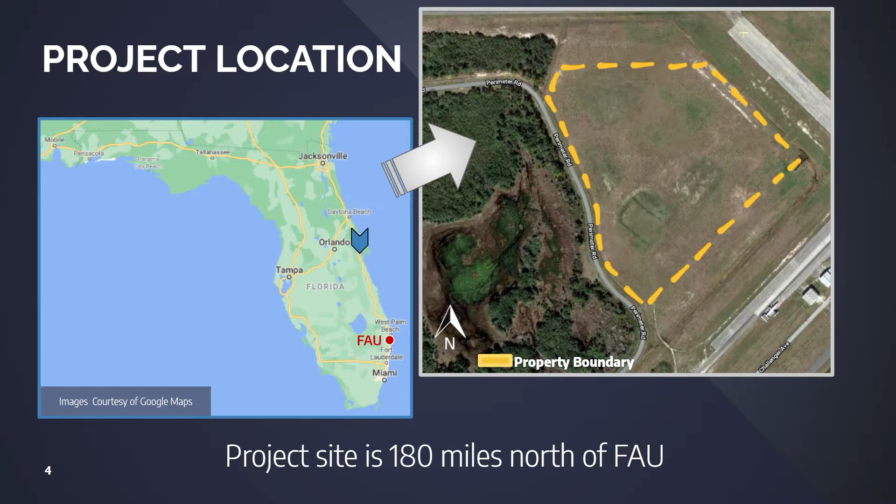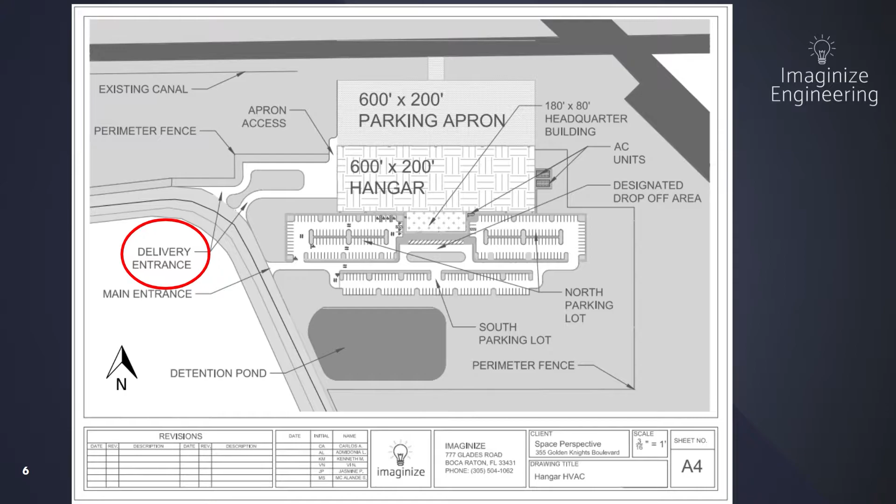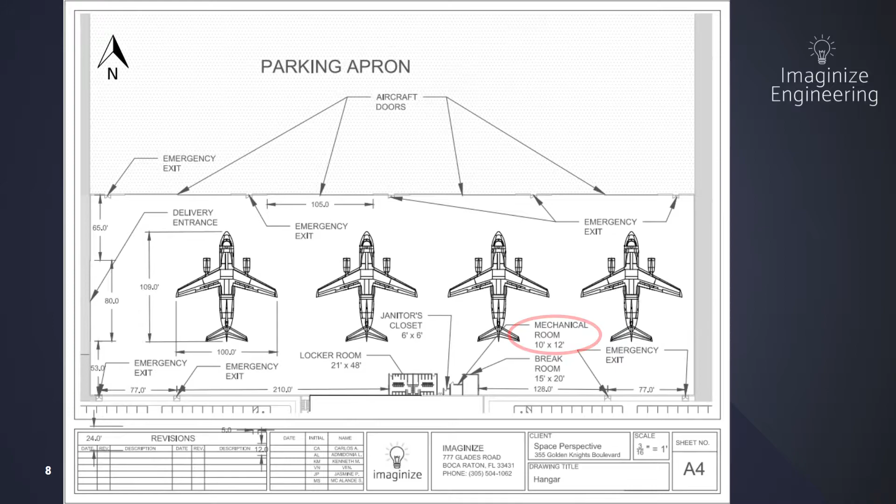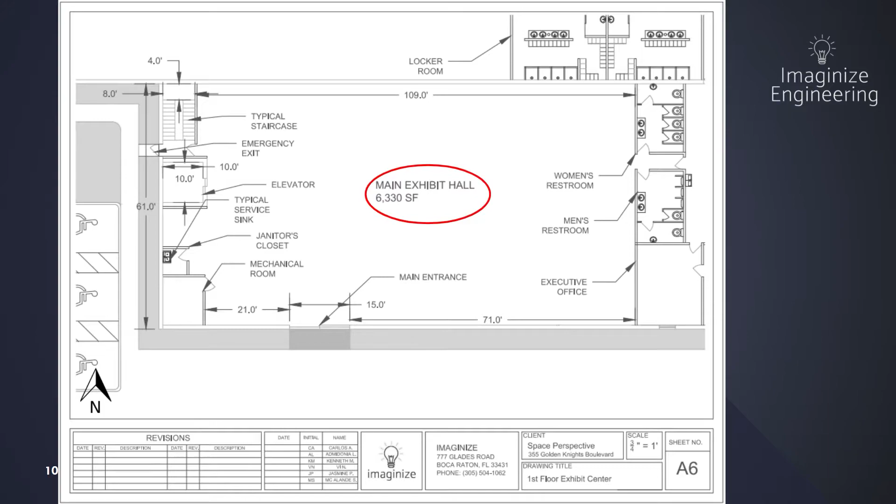The west side of the headquarters building will be used to house the visitor center. The main guest entrance will lead to an open 6,330 square foot space, which serves as the main exhibit hall. Guest restrooms can be found adjacent to the exhibit hall, and access to the second floor can be reached using the elevator or the staircase on the west wall of the building.

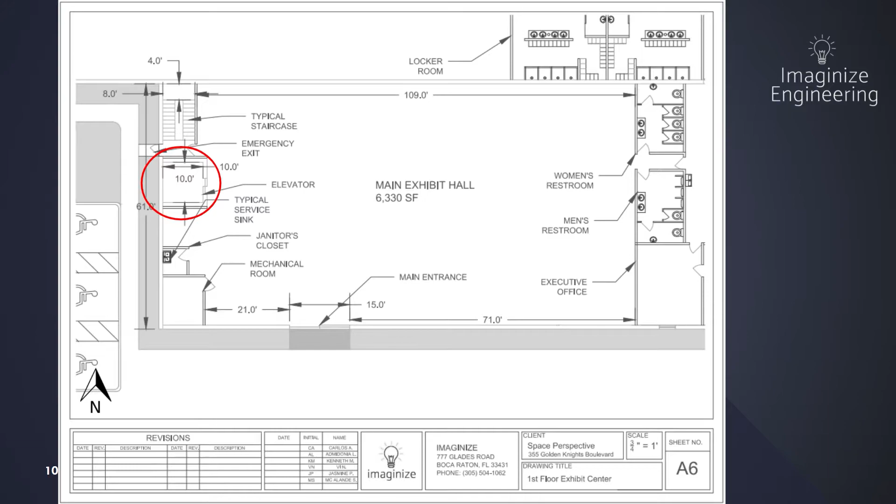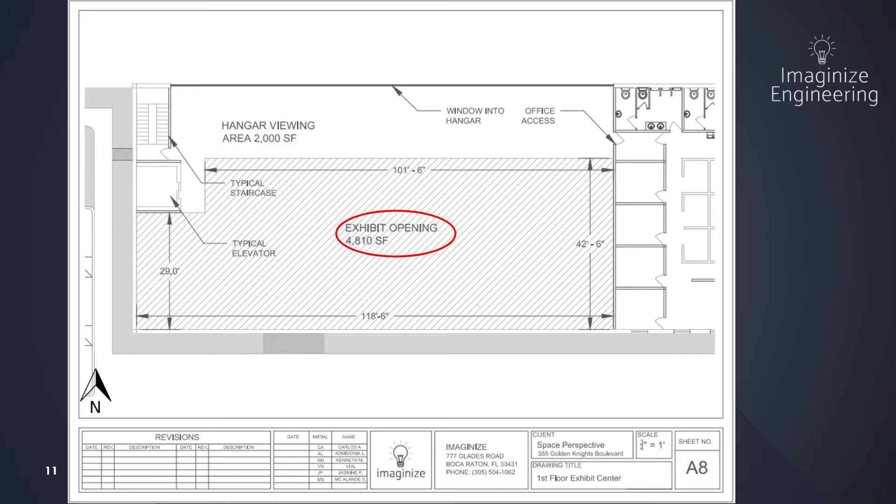The second story of the west side will incorporate a 2,000 square foot viewing deck, which will allow guests to view the manufacturing process within the hangar through a 110-foot long window. Additionally, there will be a large 4,810 square foot opening to allow large exhibits on the first floor to extend past the ceiling while also providing a bird's eye view of the exhibits below.

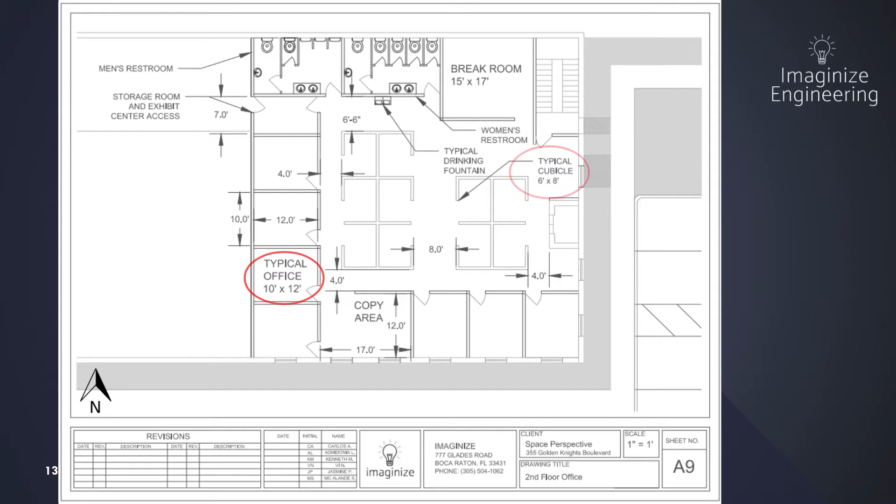The remaining offices will be located on the second floor, which can be accessed using the employee elevator or staircase. This space will house 7 120-square-foot offices as well as 10 48-square-foot cubicles for additional employees.

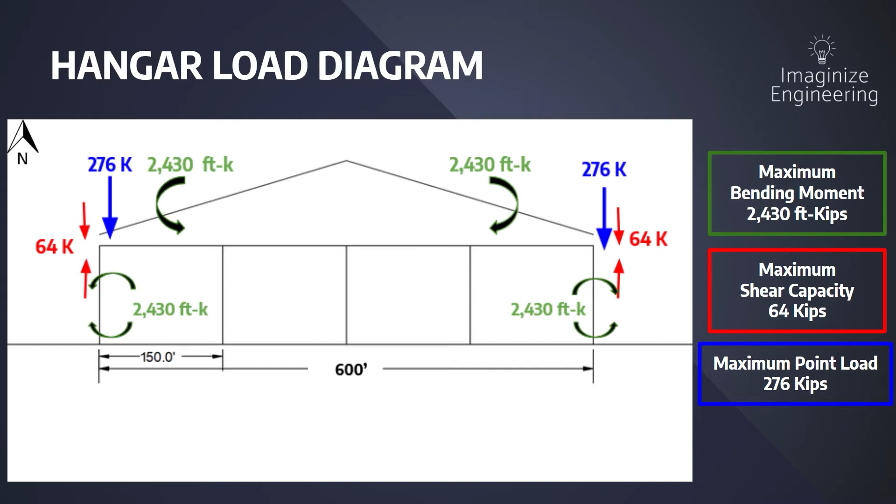Through performing structural analysis, it was found that the hangar will have a maximum bending moment of 2,430 foot kips, a maximum shear capacity of 64 kips, and a maximum point load of 276 kips. All components of the structural design were considered to accommodate these loads. Upon conducting the soil analysis, it was found that a 7.5 foot by 7.5 foot by 2 foot footer size with number 8 rebar spaced at 14 inches would be required for the foundation.

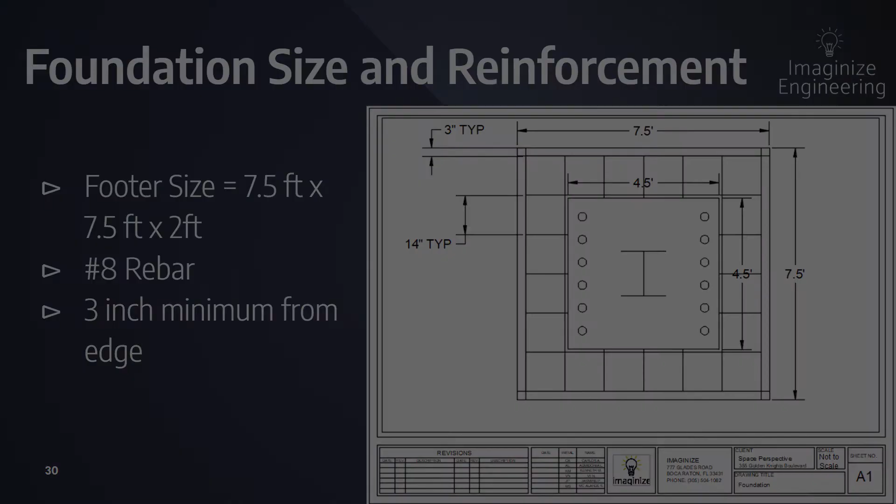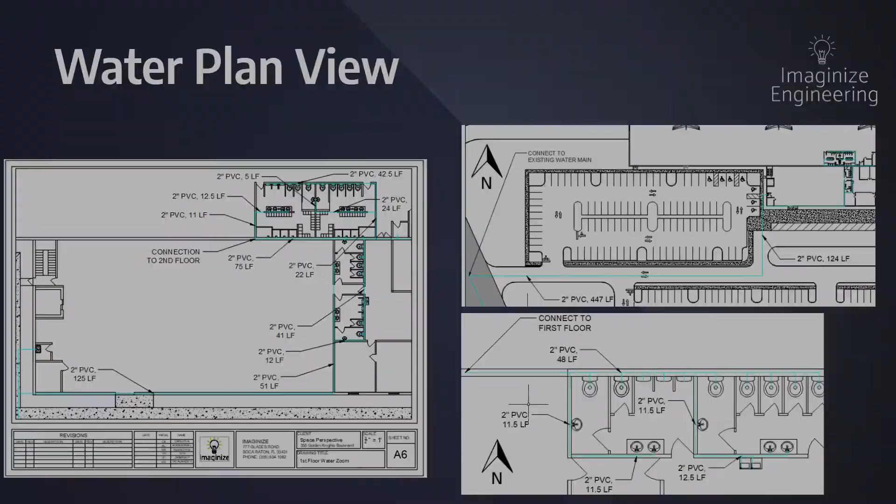This is our design for the water distribution system. It was found that 274 fixture units would be required. The system would require a 1.5 inch meter size and a 2-inch PVC pipe size throughout the network. Additionally, the sewer system would incorporate 210 fixture units with a 4-inch PVC pipe with a 1/2 inch slope throughout.

Throughout the design process, the Imaginize team always strived to implement green building practices into the building's design. Upon completion of the design, it was found that the project achieved 9 points for water efficiency, 6 points for materials and resources, 14 points for indoor environmental quality, 1 point for location and transportation, and 4 points for sustainable sites.

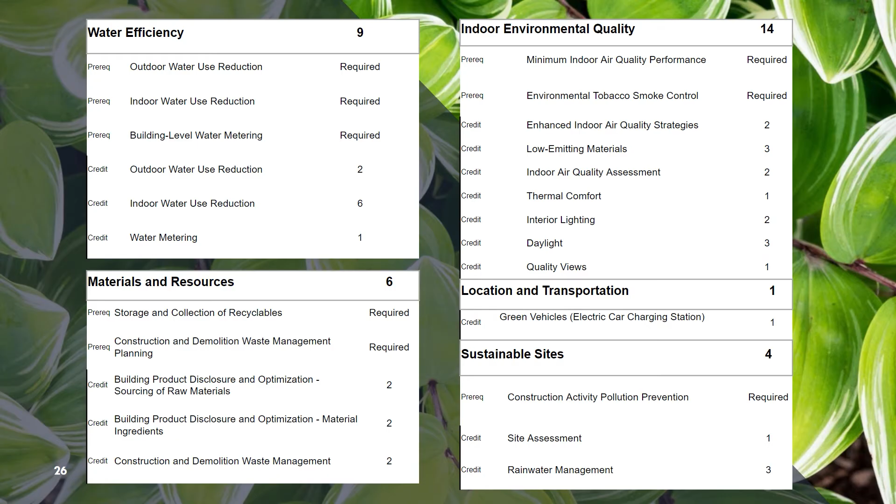As fellow engineers, the Imaginize team is very invested in all aspects of science and discovery, particularly those dealing with advancements for humankind. We strongly support the work that Space Perspective is seeking to accomplish, and work tirelessly to provide the best possible facilities for them to continue their work.

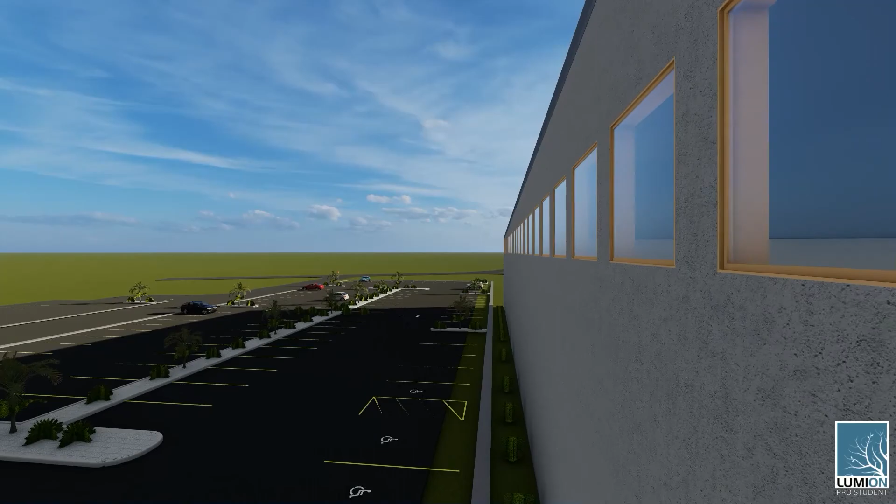As we continue to excel here on Earth, our attention has turned to the skies in hopes of advancing our civilization past the confines of our own planet. We believe that companies like Space Perspective are making strides toward a better future by providing opportunities for more people to be exposed to the magic of science and discovery, particularly with space exploration. We hope that the facilities designed will serve Space Perspective well in all their endeavors, and that in the future our civilization will be among the stars.